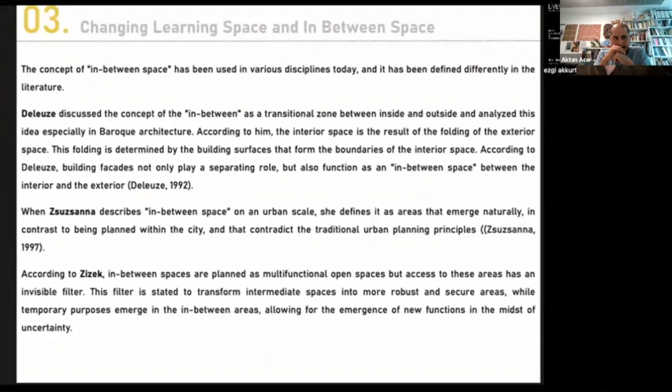I don't want to bore you by reading this in detail - we wrote it in full in the text, including Deleuze and Zizek's statements. As an example of designs aimed at creating in-between spaces, one can point to Aldo van Eyck's playgrounds located within the city, which serve as examples of spaces generating in-between space.

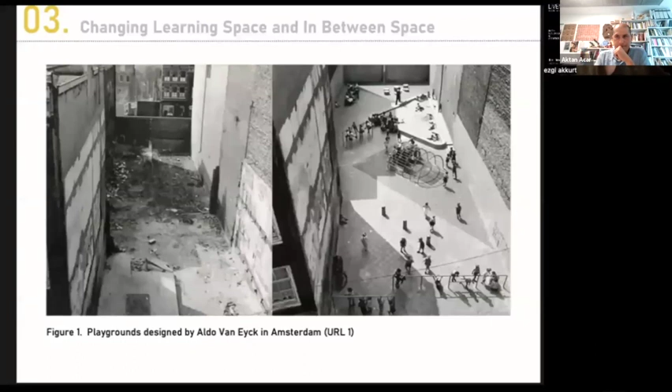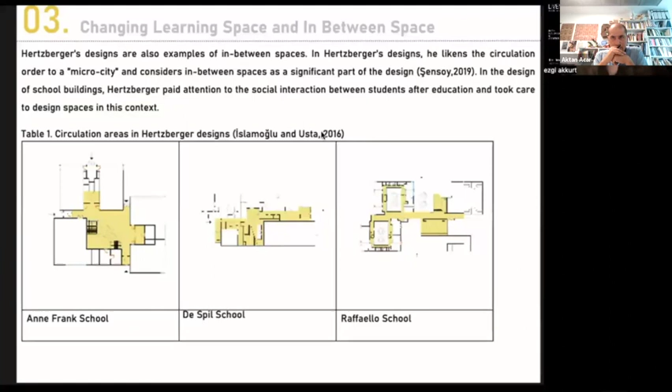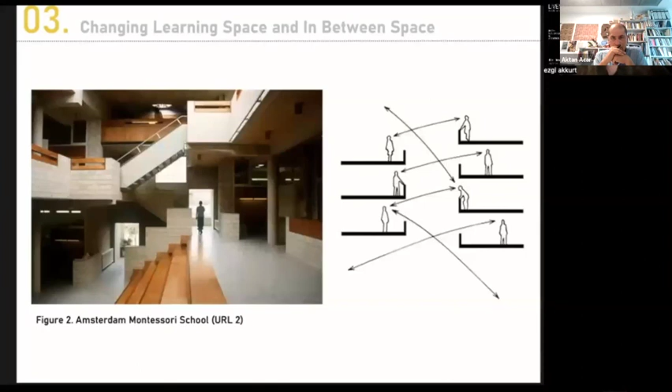Hertzberger's designs are also examples of in-between space. In Hertzberger's designs, circulation relates to a microcity, and he considers in-between space as a significant part of the design. We can see their design in a table. For example, Hertzberger designed the gallery space in the Amsterdam Montessori School to provide social interaction, and designed each section for learning. In this figure, we see the forms of in-between space formation in Hertzberger's design.

Hertzberger's concept of informal learning has encouraged the creation of multipurpose outdoor spaces in addition to interior design. Like the design above, there are schools in Turkey designed with similar characteristics. The Istanbul Seismic Risk Mitigation Project reconstructed educational buildings, including some public buildings, and this project sets an example for the design of modern educational buildings.

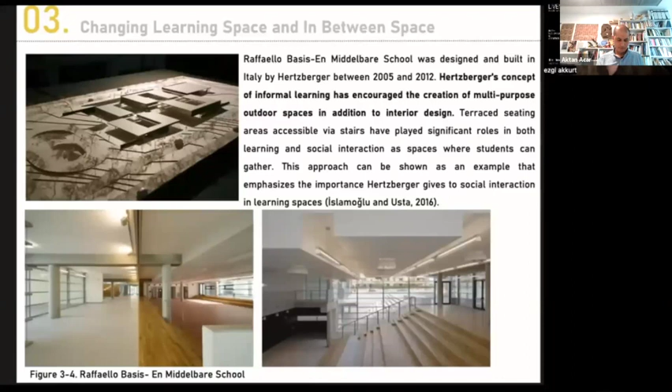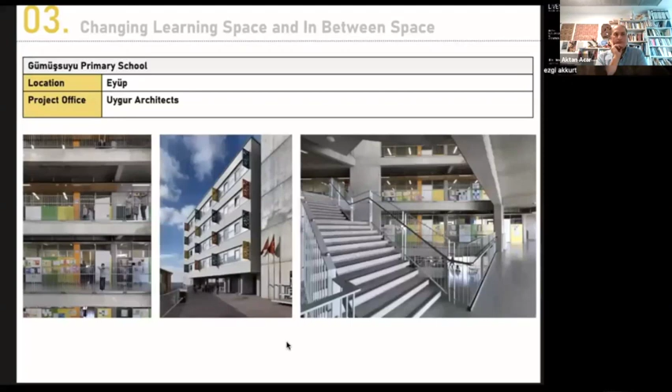Circulation areas in educational buildings are conceived as spaces for transportation, as well as areas that will increase social interaction among students and teachers.

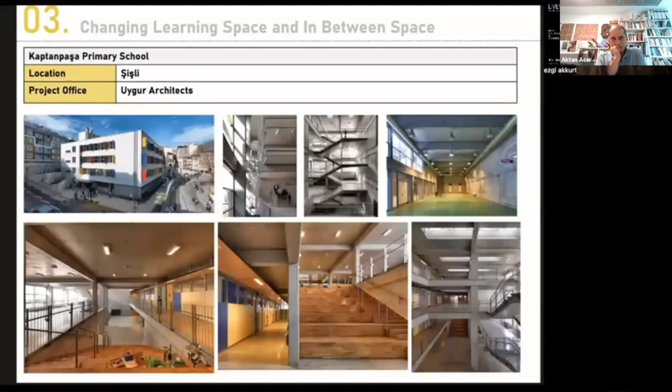For example, Kaptanpaşa Primary School, Rıfat Ilgaz, Muallim Cevdet.

When the existing research on in-between spaces in the literature are examined, behavioral mapping, walking tours, and interviews with focus groups come to the fore as methods. I will try to explain these methods briefly.

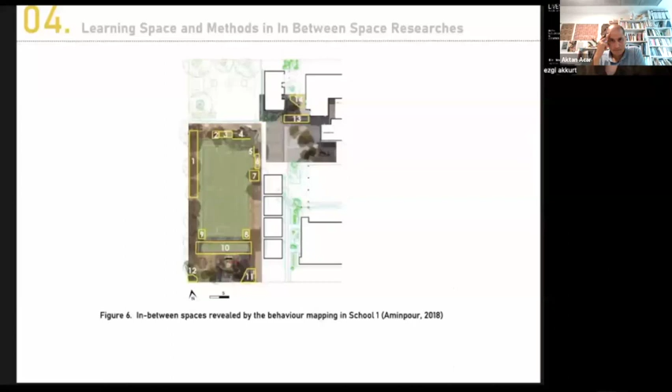When we look at the behavior mapping process schema, the steps are as follows. In Aminpour's study on the role of in-between space within outdoor school environments in children's expression of agency, the regions determined in the school selected for behavior mapping are indicated in the figure.

Evaluations based on existing studies on learning spaces and in-between spaces research. The analysis conducted using the methods mentioned above emphasize content analysis and graphical presentation.

In the school designed by Hertzberger, the focus is on how the spaces should be to support learning and teaching. In this context, the concept of in-between spaces has emerged, and this concept is considered as a threshold.

Aminpour stated that there are accidental areas of experience in between spaces. Aktan stated that learning is not limited to walls, and that learning and social interaction can take place in between spaces.

Within the scope of the paper, the existing literature on in-between space and informal learning spaces was reviewed, and the methods of the studies on in-between space were revealed.

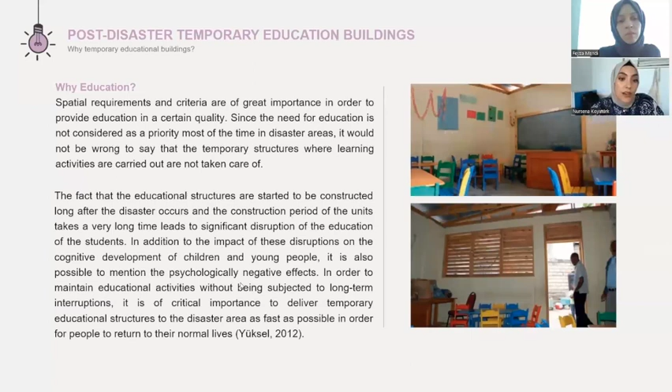Why education? Spatial requirements and criteria are of great importance in order to provide education of a certain quality. Since the need for education is not considered a priority most of the time in disaster areas, it would not be wrong to say that the temporary structures where learning activities are carried out are not taken care of. In order to maintain education activities without long-term interruptions, it is of critical importance to deliver temporary educational structures to the disaster area as fast as possible so people can return to their normal lives.

Now I will be talking about the design proposal's material selection. I will try to clarify how we chose the materials to be applied to the model. The material selection process for the design proposal involves careful consideration, so we aim to strike a balance between durability and cost effectiveness while ensuring that the chosen materials align with the overall vision and purpose of the model.

In line with the sustainable design criteria, the structural material of the space was determined to be a cardboard tube system. Cardboard tubes are elements in the form of cylinders made of wood pulp. The lightweight, durable, economical, easily applicable, superior insulation and recyclable material properties of the building system are a serious alternative for the urgent and safe building need that arises after the earthquake.

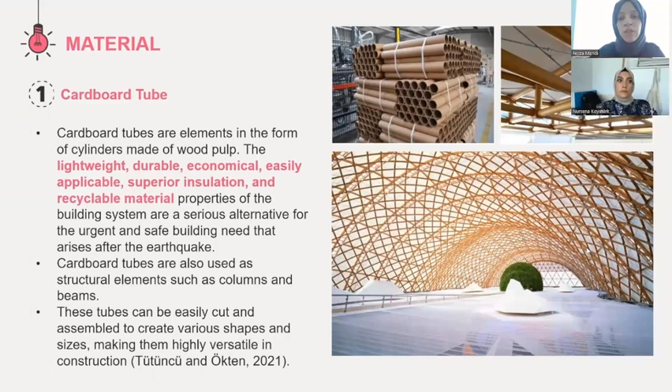Cardboard tubes are also used as structural elements such as columns and beams. These tubes can be easily cut and assembled to create various shapes and sizes, making them highly versatile in construction. Besides, the use of cardboard tubes as structural elements allows for quick and efficient assembly, reducing construction time and cost as well. So finally, I will present our design idea for a temporary education building and explain the design process.

In the design phase of sustainable temporary education structure after the disaster, it is important to select construction systems that can be constructed in a short time, are lightweight, easy to store and transport, easy to disassemble and reassemble, do not require expert labor, allow spatial reproducibility, do not emit noise to the environment, and are low cost and durable.

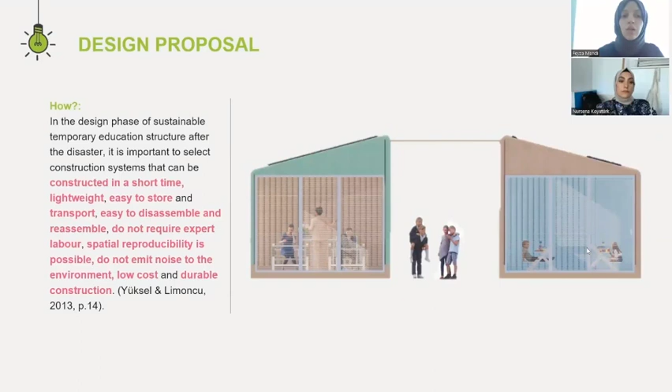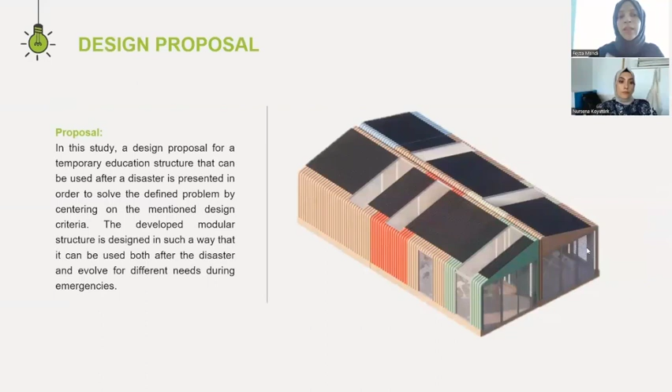In this study, a design proposal for a temporary education structure that can be used after a disaster is presented in order to solve the defined problem, centering on the mentioned design criteria. The developed modular structure is designed so that it can be used both after the disaster and evolve for different needs during emergencies.

The module design was guided by universal design principles. One of the crucial points during the design process was making the use of modules simple and intuitive. A color coding system was used to facilitate installation, since the number of functions and the way they can come together will vary depending on the area and location where the temporary education structures are used.

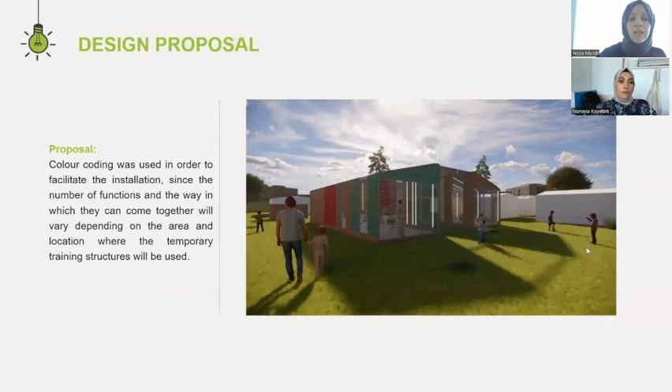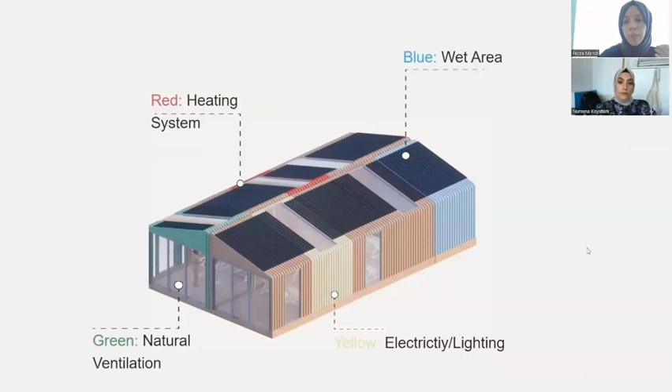To clarify, as you can see in the picture, the blue modules identify wet areas, red symbolizes the heating modules, yellow represents the electricity cables, and green represents the natural ventilation function. You can also see we have photovoltaic panels on top to obtain the energy the modules need. So this is the overall design.

This is one of the options for alignment of the modules. There are several ways to put them together, and I will show you the different options as well.

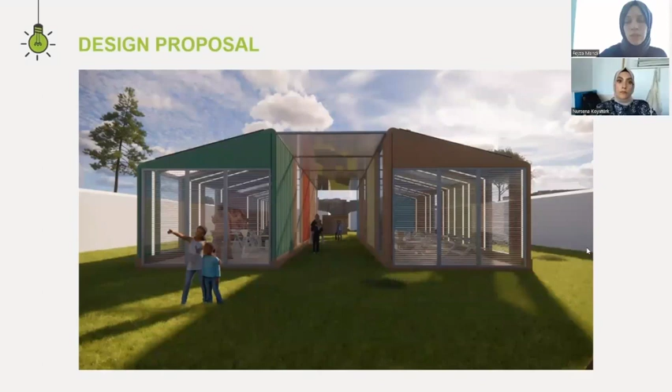The modules are designed to be adaptable to changes in the number of users by extending and expanding through transverse and longitudinal articulation. This adaptability and flexibility ensure the modules can easily accommodate an increasing or decreasing number of users without requiring significant modifications or replacements.

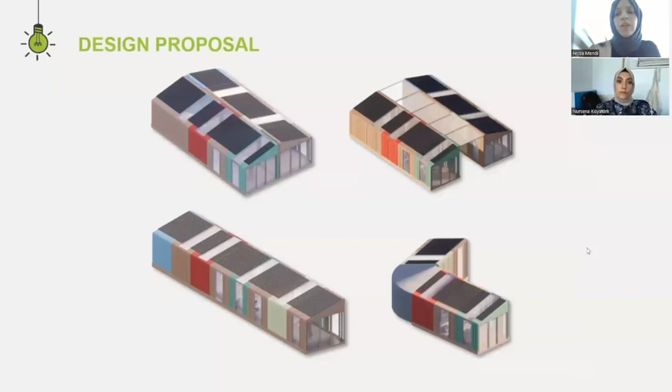As you can see here, in line with the needs of a particular disaster location, modules can be aligned differently. In this picture, you can also see the non-assembled cardboard tubes and how we can easily store them.

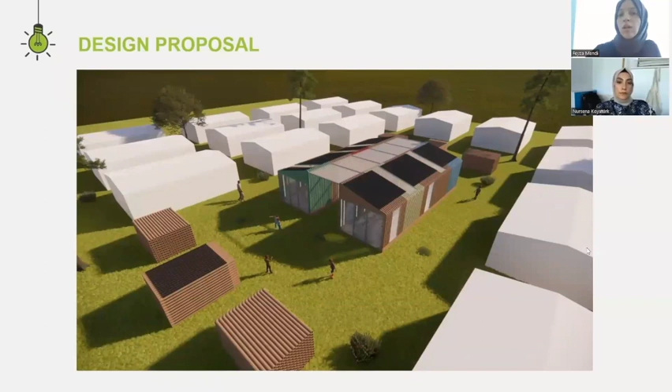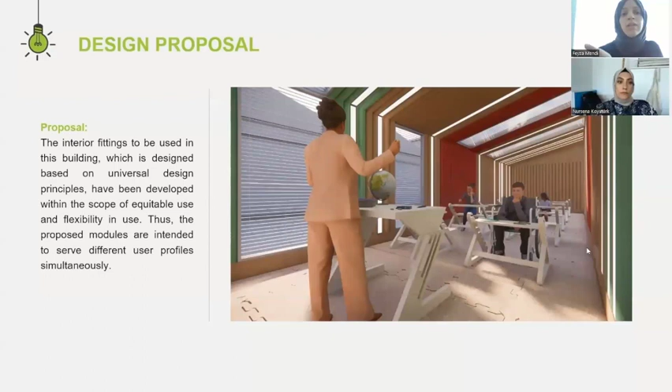As well as the overall design, we have carefully considered the interior layout to promote collaboration and adaptability. The interior fittings used in this building, which is designed based on universal design principles, have been developed within the scope of equitable use and flexibility in use. Thus, the proposed modules are intended to serve different user profiles simultaneously.

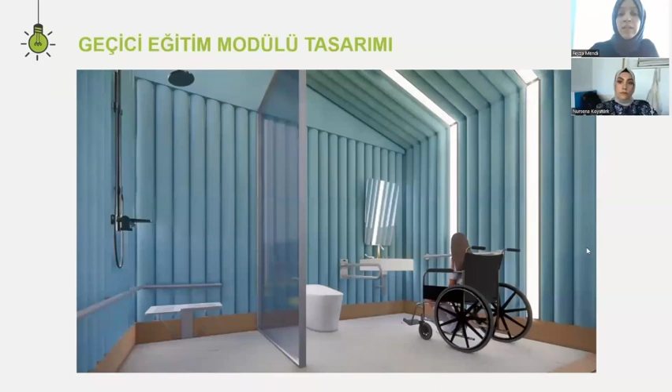You can see the interior perspective of the space and the furniture design here. This is an interior perspective of a wet area module. We also considered people with disabilities and their needs. This is another perspective from the interior showing different furniture alignments.

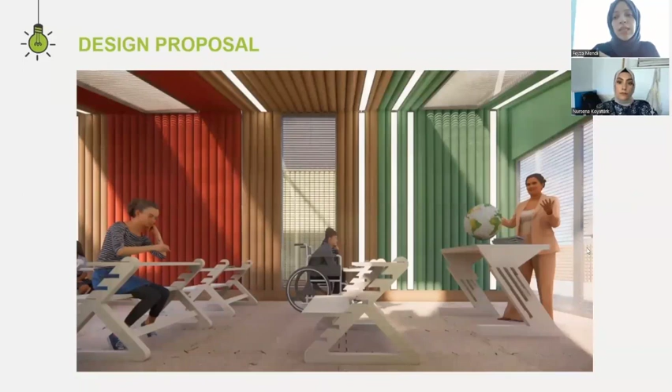You can also see the adaptable furniture design in a detailed way. According to user needs, the seating height or working surface height can be adjusted.

Consequently, while EduTube creates a model for the continuation of children's education process after a disaster without interruption, it is also able to meet the basic sheltering needs of not only children, but also disaster victims of all age groups, with its adaptable features.

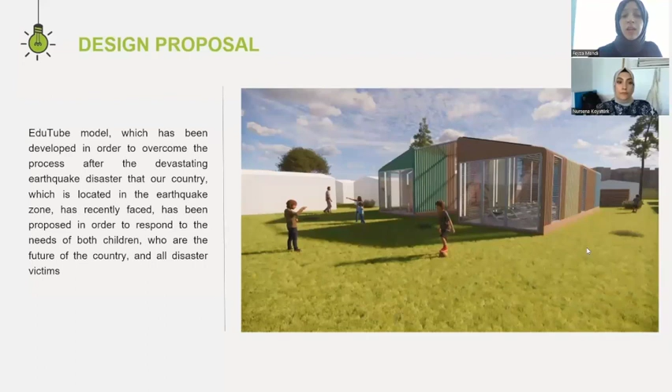The EduTube model, developed to overcome the process after the devastating earthquake disaster that our country, located in the earthquake zone, has recently faced, has been proposed in order to respond to the needs of both children, who are the future of the country, and all disaster victims.

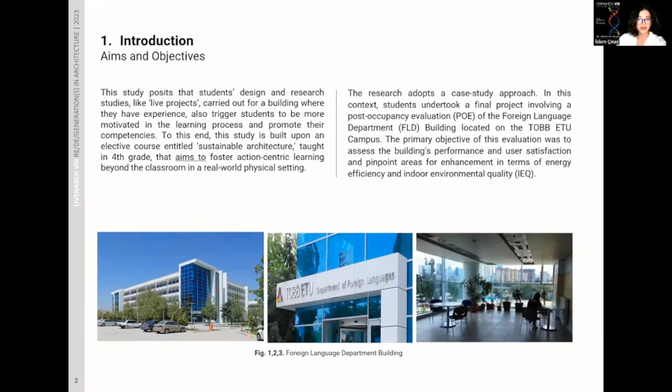The research adopts a case study approach. In this context, students undertook a final project involving a POE of the foreign language department. The primary objective of this evaluation was to assess the building's performance and user satisfaction, and pinpoint areas for enhancement in terms of energy efficiency and IEQ.

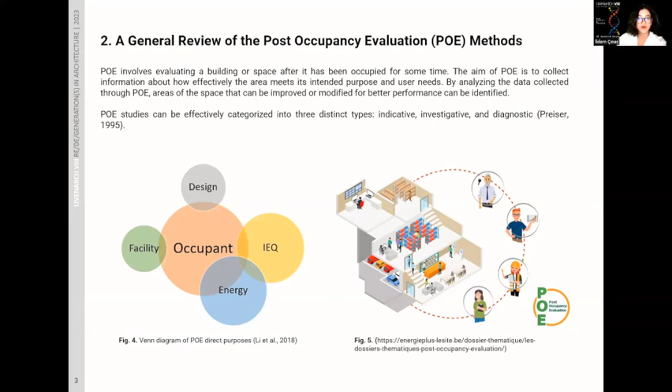I will give some brief information about POE. POE involves evaluating a building or space after it has been occupied for some time. The aim of POE is to collect information about how effectively the area meets its intended purpose and user needs. By analyzing the data collected through the POE, areas of the space that can be improved or modified for better performance can be identified. Additionally, this data helps comprehend how occupants' satisfaction in buildings is influenced by factors like thermal, acoustic, and visual conditions, air quality, as well as other aspects of the workspace and building, such as views, furniture arrangements, privacy, cleanliness, and control over the internal environments.

The evaluation studies primarily adhere to POE stages outlined by RIBA, with a primary focus on IEQ: collecting client experience, building layout analysis, user feedback on IEQs, and gathering utility bills. The aim of these evaluation steps was to identify both passive and active intervention points that could enhance the building's energy efficiency, eliminate on-site fossil fuel usage, and improve IEQ for occupants.

Using the POE results and feedback from occupants, each group performed a range of analyses. They utilized a building information modeling platform and supplemented their analysis with Climate Studio, which is available as a plugin for Rhino. These analyses include assessment of solar radiation, daylight level, glare, U values of building facades, illuminance, radiance, and daylight factor. Subsequently, each group devised interventions and conducted further analysis after implementing these interventions.

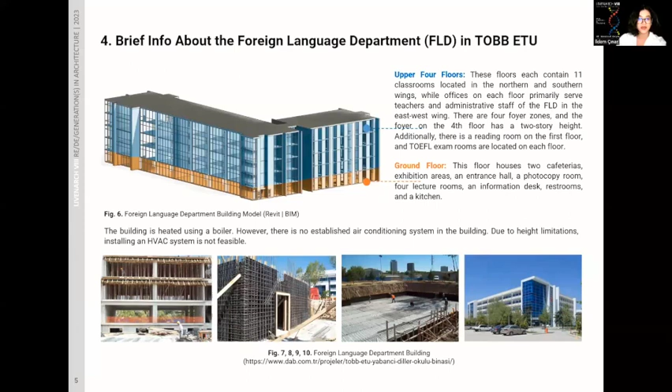The reading hall is situated at the southwestern corner of the building, featuring glass curtain walls on each facade. Regarding thermal comfort, occupants reported discomfort during the summer due to the excessive heat from the curtain walls.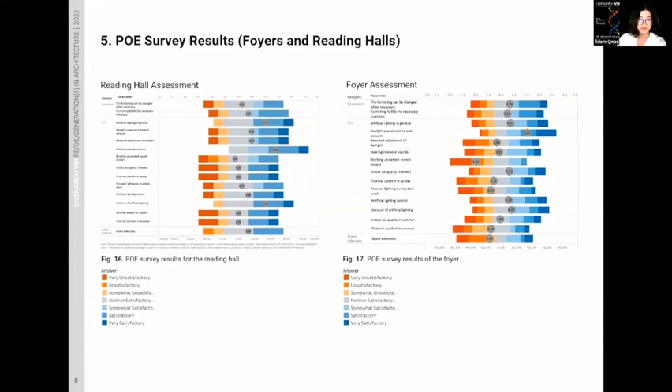The foyer halls are situated on the southeastern facade of the building. When evaluating the foyer areas based on satisfaction areas, it appears they don't effectively prevent unwanted sounds. During summertime, the thermal comfort rate is low, prompting students to provide facade recommendations and suggestions for improving indoor comfort in this area.

Students were organized into groups of 6, and each group was assigned a specific area of the building, which included classrooms, offices, foyer halls, and the reading hall.

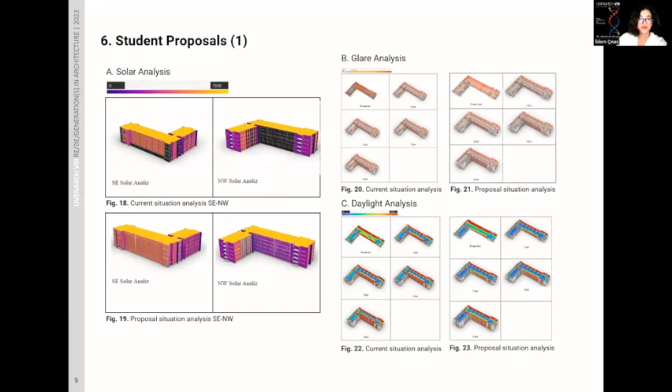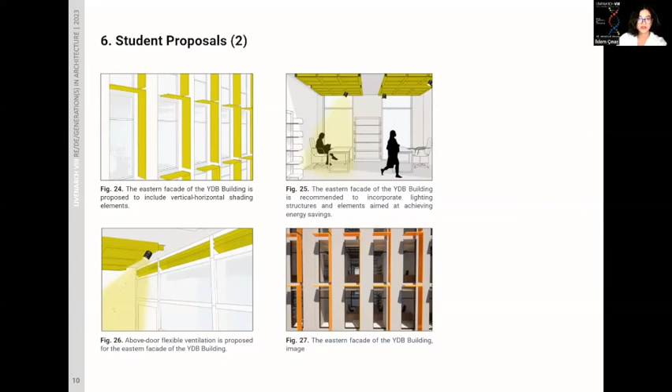The proposed intervention for the eastern facade aimed to maximize solar energy utilization through shading elements and double glazed windows with low-E glass. Solar glare and daylight analysis were conducted to improve energy efficiency and user comfort. To address glare issues, louvered windows are suggested for north-facing classrooms. For the southern facade, a naturally ventilated curtain wall system with shading elements is recommended.

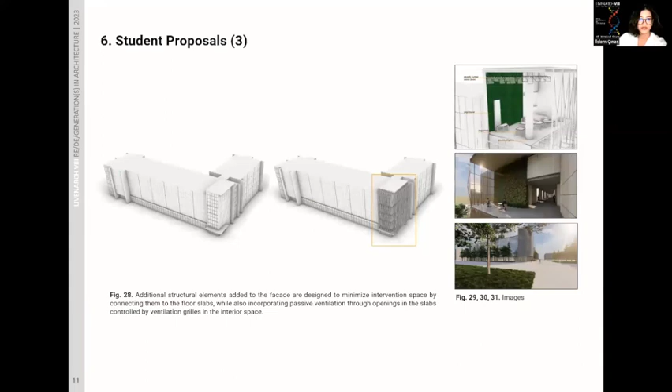Interventions include a fabric mesh facade for thermal comfort, modern and sustainable furniture and equipment, various interior finishes for improved comfort and acoustics, and additional lighting options.

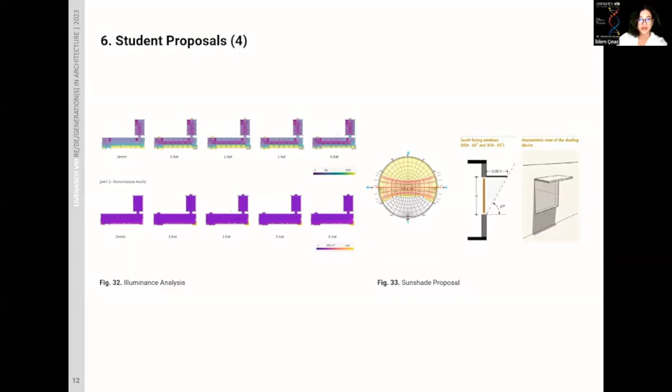The student group's redesign focuses on both aesthetic and practicality. They consider life cycle assessment for materials, emphasizing environmental sustainability.

The inclusion of POE in architectural education is of great significance. This underscores the imperative for a sustainable approach to reducing energy consumption and carbon emissions. POE provides students with an opportunity to comprehend real-world building performance, identify areas for improvement, and gain insights into sustainable retrofitting strategies.

This study employed POE to examine user experience and the performance of a university building. The student group proposed recommendations to enhance functionality, comfort, energy efficiency, and user experience within the building. However, the feasibility of this proposal must be rigorously assessed, taking into account cost effectiveness analysis and user feedback.

This study serves as an illustrative example of how architectural education can adapt to the evolving demands of sustainable design, preparing future architects to address the pressing environmental challenges of our time.

Hello everyone, my paper is titled Reframings in Long Exposure, Capturing the Generative Forces of the Middle East Technical University Campus Competition.

This study is further developed from my continuing PhD dissertation at the Middle East Technical University, Department of Architecture. It is being supervised by Professor Dr. Güven Arif Sargın, and I want to express my gratefulness to Professor Sargın for his contributions and guidance on my PhD research.

Realization and design development stages of Altuğ Çinici and Behruz Çinici's first winning prize for the Middle East Technical University competition integrate one of the most comprehensive, challenging, and complex post-war competition histories in Turkey. Analyzing the vast and very influential open archive of Çinici's in the Salt Archive provides invaluable insight into the design process of the competition and also into its further articulations during the development phases.

Architects' great enthusiasm for the project reveals itself in multiple stages of drawings, including design revisions, alterations, and sometimes complete restarts in certain circumstances. This presentation engages with the METU competition as an inherent generative and regenerative force, which greatly shaped the forthcoming articulation stages of the selected architectural works, including the cafeteria, the Department of Physics, and the main library.

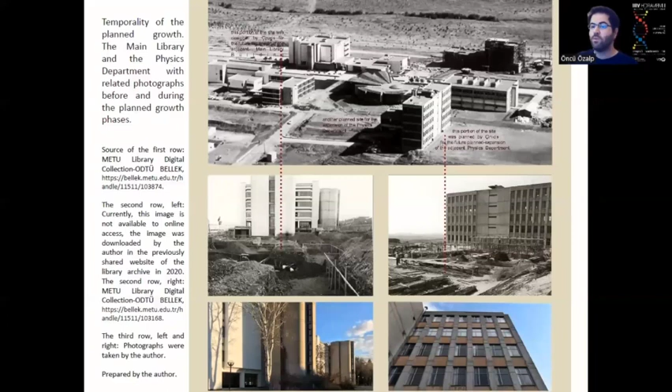Altuğ and Behruz Çinici won the first degree for the METU Campus competition in 1961. In the original competition drawings of Çinici's, the definition of the central architectural entity for pedestrian use appears as the alley. The competition board suggests strong connections between the buildings and the alley at the early stages.

Similar to that, in the realization process of the campus, the presence of the alley appears in the very early stages. The elongated and diagonal traces on the left are the very first and accurate imprints of the alley on the campus land. The same line is also visible on the right, which can be traced just in front of the Faculty of Architecture. In this sense, as an architectural element, it is as central as the Faculty of Architecture in the formation of the campus.

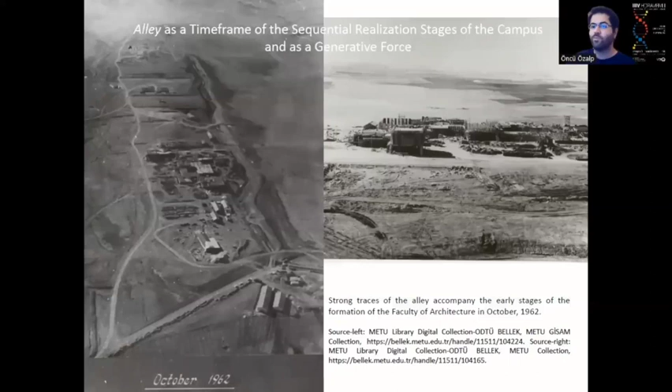Also, the imprints of the alley, like a time frame witnessing the realization stages of the campus, appear just in front of the physics department and nearby the construction of the library unit. It continues as a thin single strand just next to the amphitheater and follows the chemistry department. As the images demonstrate, the alley and its traces create strong visibility during the formation of the campus units.

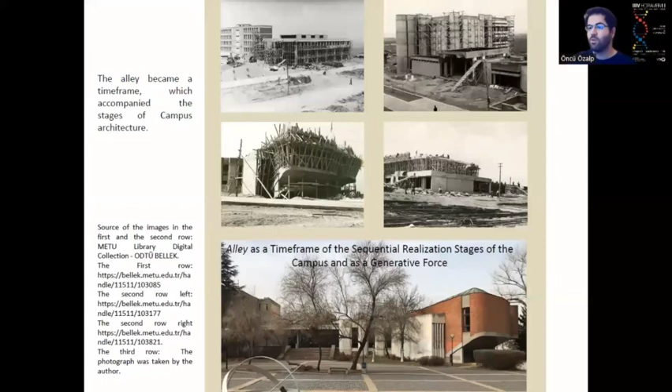Also, the realization stages and the temporality of the campus must have been very important for the architects. Like artists who include specific details about dates on various personal artworks, the architects noted the date, month, and year of the construction dates on the architectural elements.

The library, the Faculty of Architecture, and the stages of the physics department integrate the construction dates as signatures and traces of the architects.

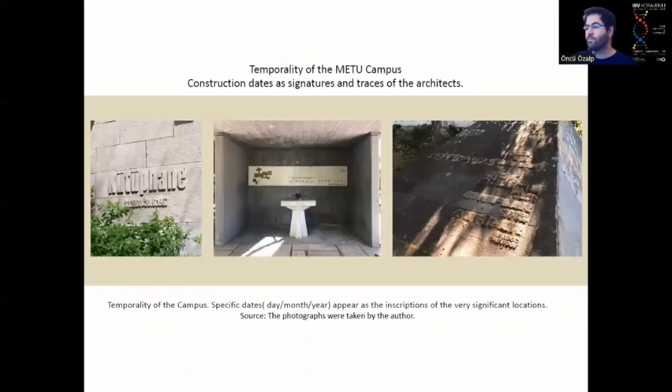In this section, I will briefly discuss the compositions of the cafeteria, the Department of Physics, and the main library buildings, which were specifically designed to be completed in stages.

And all those artworks perfectly become one with the further articulations by achieving an impressive unity after their second stages were completed. It should be emphasized that the first stages of those units were completely in use by the university population, and the buildings responded to the needs of their users until their planned growth had started.

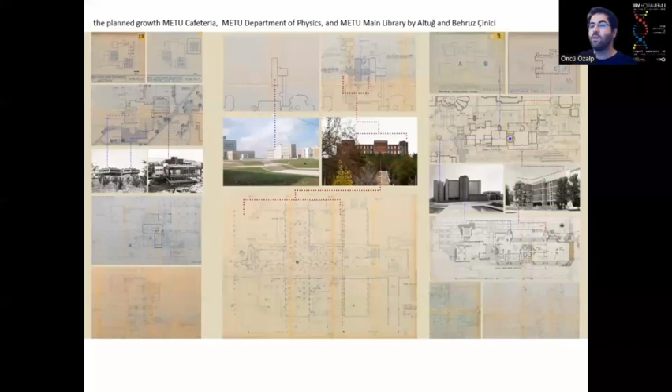Following the modifications between the photographs reveals one common feature, which is that architects designed the specific places of expansion areas with a minimum destruction of the pre-existing unit, primarily via revising circulation zones.

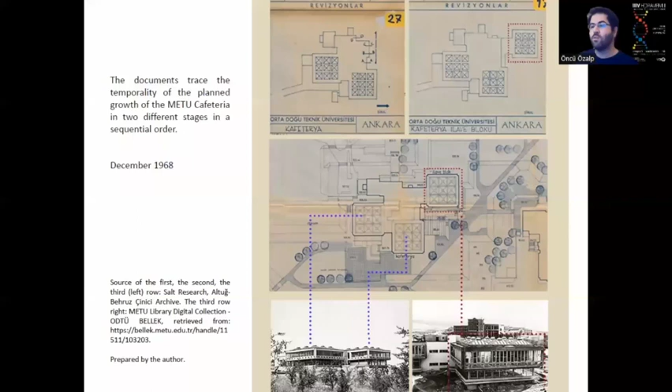The growth of METU Cafeteria in the Çinici archive was dated as December 1968, and the modification of this unit seems to be the most challenging one among those three examples. Shown in crimson red, the second growth included the dining hall for the guests on the ground floor plan.

The traces of the blue dotted lines intersect where the expansion happened on the ground floor plans for all examples. While the pre-existing wet spaces partly remain, a new core was built and redefined the servant spaces, including the installation shaft, in the second stage.

One of the most impressive design decisions in the first stage follows the inclusion of an alternate spare room at the core of the future expansion area. It clearly indicates the first stage of the plan was masterfully designed for change during the future transformation stage.

The growth of the METU library was noted as January 1972 in Çinici drawings. The building is elongated on a continuous axis and aligns with the alley in the north-south direction.

As followed from the images, the very first stage integrated the construction of the core, which was indicated as blue in the left section of the figure. The core included the circulation of the wet spaces, which were also used for the same functional purposes after the expansion stage. Demonstrated with crimson red, the second stage articulation completely enclosed the core.

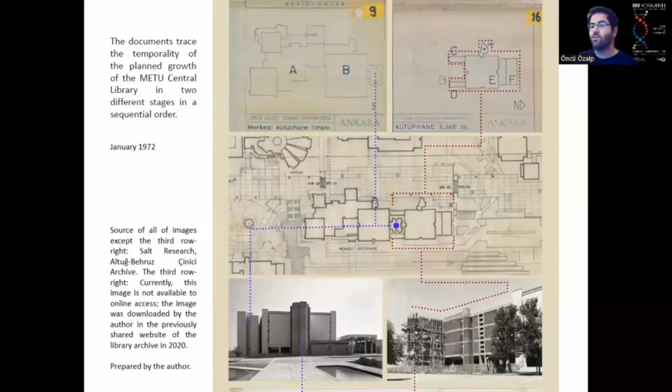The architects achieved unity by integrating the core into the new composition and designed a new sculptural circulation core for the stairs, which has the same form as the one in the first stage.

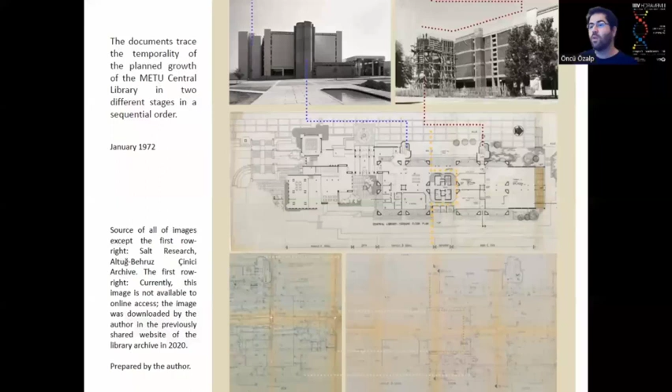After the second stage, the ventilation openings of the wet spaces in this core directly overlooked the blind walls of the B and C units, and well articulated the wet space ventilation without any obstacles.

The expansion of the METU Physics department also partially aligns with the spatial logic behind the library. By designing a unit corresponding to the main prismatic mass with the same dimensions and incorporating two circulation cores, the physics department very much depends on reflecting its first stage.

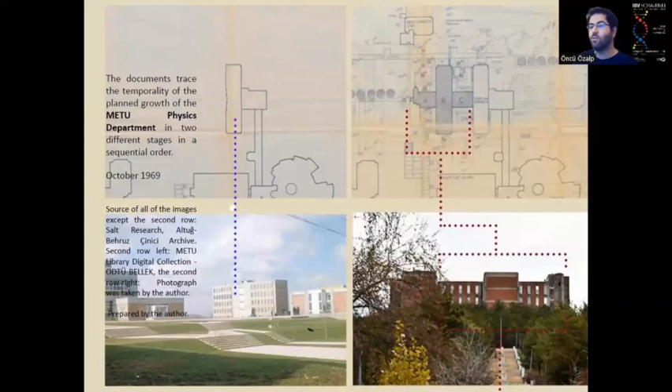Very impressively, all of those buildings, which the author considers as artworks, had the aesthetics of the architectural compositions intensified with further articulations. However, in their first stage, the buildings also seemed, quote, 'complete,' unquote, as special without any need of development.

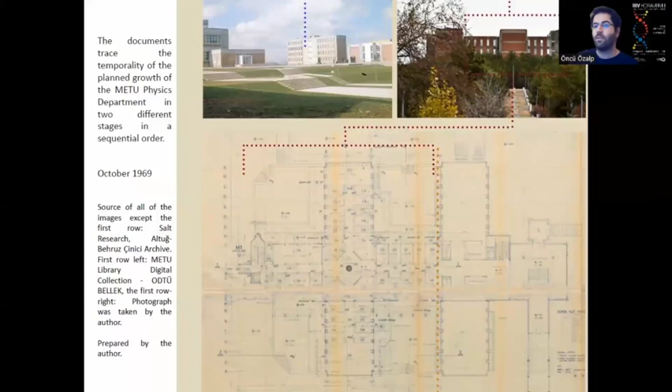Among this extensive number of post-war competitions in Turkey, revisiting Çinici's Middle East Technical University Campus Competition proposal, its alterations, and the stages of its realization generate the behind-the-scenes story of the campus design.

Similar to the traces of the continuous design alterations in the campus proposal, further development of these three units in this presentation provides a particular design narrative.

Exploring the second stage extension of those three campus buildings suggests that in order to reach an organic yet strictly planned spatial development for the unity of architectural compositions, and to take a critical position against standardization, architects explored a unique design vocabulary at the very beginning of the architectural design stages and explored the idea of planned growth in the compositional and aesthetic features of the campus.